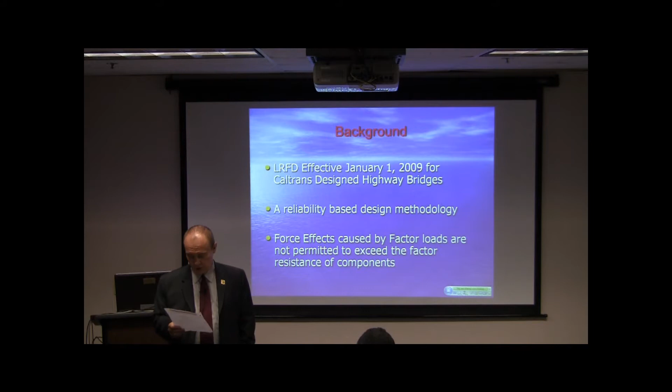So our first speaker actually graduated from an excellent school. Maybe I'm not objective. He graduated from, guess what, USC. His name is Sharid Amiri. He is a senior transportation engineer at the California Department of Transportation, also known as Caltrans. He graduated only 2 years ago, and his area of research was earthquake response of bridge pile foundations. His advisor was Dr. Jeff Martin, I believe. I was lucky to be on his Ph.D. dissertation committee. So I think I know what he's going to talk about today.

He has been involved with mega projects through Southern California in design and construction of major highway projects. He's a member of the American Society of Civil Engineers. He's a registered civil engineer with the state of California. He's a member of Caltrans Deep Foundation Committee, an affiliate of Caltrans General Earthquakes Committee, and Caltrans Post-Earthquake Investigation Team.

You should be in New Zealand then.

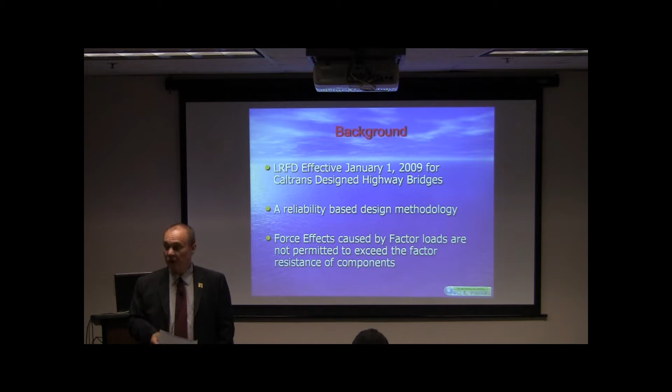He's active with the Transportation Research Board, known as TRB, and is also active on a particular committee called Bridge Seismic Design and Bridge Foundations. So, Sharid, the floor is yours.

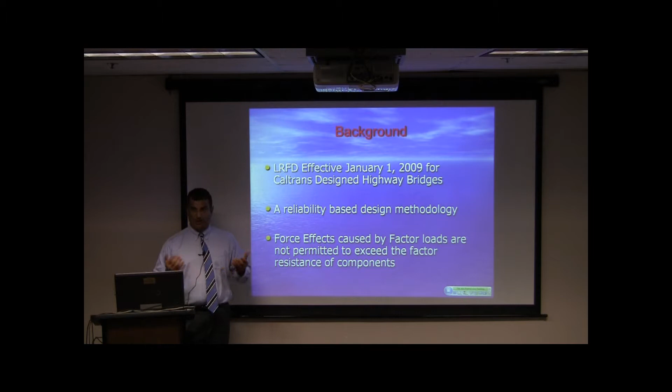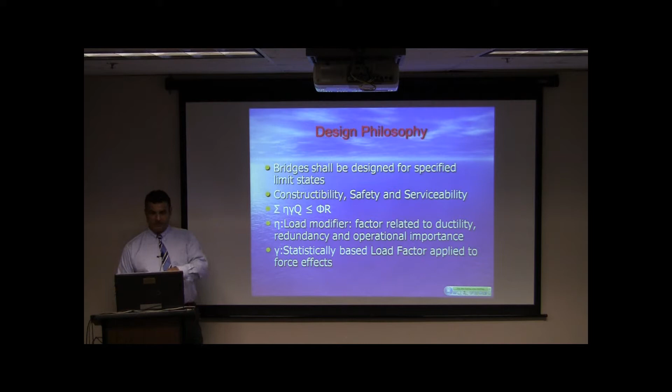Okay, now we go to the second slide. As I mentioned, there's an equation on the third bullet item. But before we go to that, the bridges that we're designing have to adhere to some design criteria for limit states. We'll get to that later on, but we also want to make sure that it's constructible, safe, and serviceable.

In the equation in the third bullet item, on the left-hand side of that inequality you have the summation of your loads, and on the right-hand side you have resistance. So as I mentioned, your resistance has to be higher than your loads. Now, every single coefficient within that equation has a meaning. The eta is the load modifier.

The gamma is the factor applied to force effects. But one word that you may want to bear in mind, it's important, is the emphasis on statistically based load factor. Why are we saying statistically based? And also statistically based resistance factors, which is on the resistance side. The phi there is the resistance factor. That goes, in my view, to the heart of the LRFD design methodology.

What we're doing is we're statistically looking at these elements, and we want to make sure that we don't exceed the probability of exceedance, and we want to make sure that we satisfy those limit states that I'll be talking to you about in more detail later on, which is different from a factor of safety, because as you know, when you're designing your bridge structural components, you used to use a different factor of safety for different components, be it foundation or otherwise.

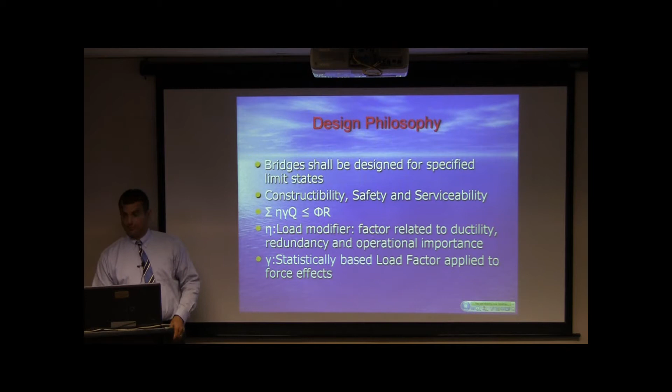Now we're departing from that, and we're using probabilistically based methods to come up with our resistance factors and our load factors for our bridge components, hence LRFD. Now, the Q is for force effects, but this phi is not the phi that a lot of people confuse with the soil friction angle. That's not the case here. This is a resistance factor that we use for LRFD, and it's a multiplier that is applied to the nominal resistance of your piles or foundations in this case.

Now, how do we come up with these resistance factors? Well, AASHTO, the American Association of State Highway and Transportation Officials, which is basically the body that comes up with the design codes for LRFD and design of bridges nationwide, has come up, with help from the experts, with the resistance factors to use. But here our emphasis is California. What do we do in California? We need to come up with these resistance factors for soil to design bridge foundations. We don't use a factor of safety of 2 or 3 anymore. Now we're using resistance factors. And how do we come up with that? I'll discuss that later with you.

But it's important to note that these resistance factors are different from state to state, from geology to geology and from site to site, and they need to be calibrated. And in order to calibrate those resistance factors, you need to have a lot of data in your hand, which I'll refer to later. That's probably one of the challenges that we will have, and it'll actually be an exciting thing to do. As researchers and practitioners, we need to emphasize that we need more database for these resistance factors to fine-tune our approach in LRFD as far as design of bridge components is concerned.

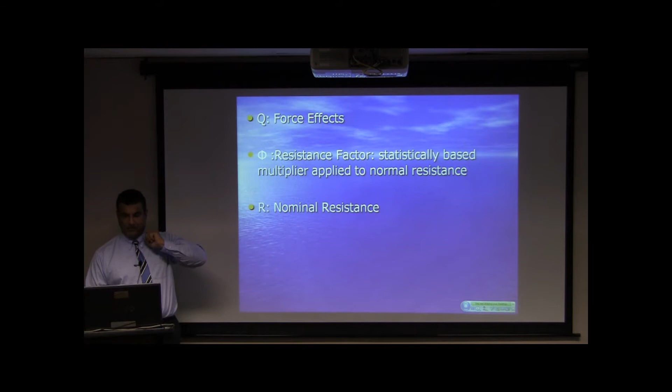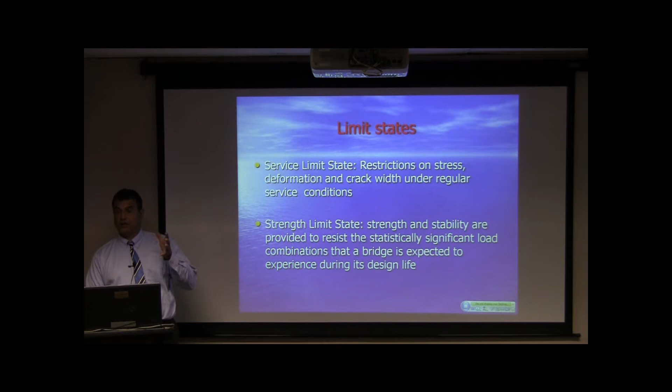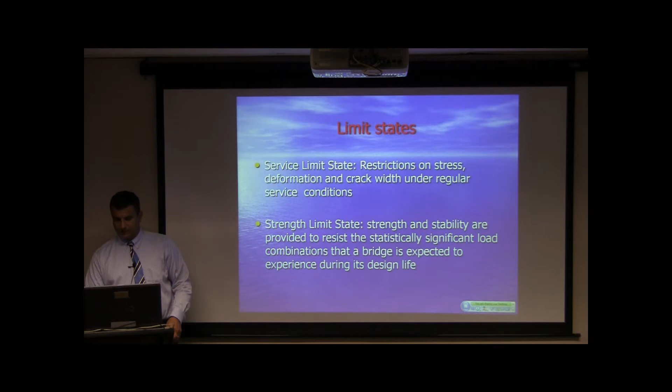Now, I mentioned limit states. For our design of highway bridges, mainly here in California, we're using the service limit state, which is basically stress and deformation under service conditions. And then you have the strength limit states, which are about stability and strength. These are important because you need to satisfy these limit states in your design as a bridge designer, a geotechnical designer, a foundation expert, or whatever your capacity is within the industry, or as a practitioner.

And of course, the last one, we can't miss that. That's the extreme event limit state, which here in California is mainly earthquake, but depending on which state you are in, you can have different issues involved. You have collision by vessel, you have vehicle collision. Of course, we can have that here too. Ice flow is not an issue here, as far as I'm concerned.

But the survival of your bridge depends on how you design it based on the extreme event limit state. And in California, our emphasis is to make sure that our bridge structure doesn't collapse under the extreme event limit state. It's the non-collapse issue. So if an earthquake occurs and your bridge is sustaining some seismic load, you want to make sure that your bridge doesn't collapse. If you want to go further, depending on which project you're dealing with, you do more than that. But as a minimum, it is non-collapse for the extreme event limit state of your structural elements.

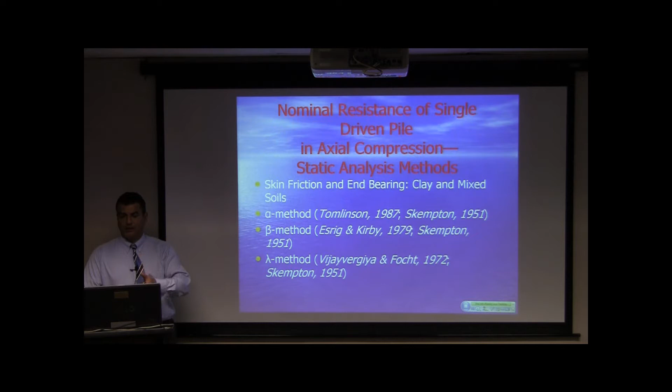For skin friction and end bearing in clay and mixed soils, I'm sure you're familiar with the alpha method, beta method and the lambda method, and these are the references there. If you are interested in the references, I'll be more than happy to provide them to you after the lecture. But the idea here is that in order to come up with your nominal resistance of a single driven pile in axial compression, you need to use these methodologies, and that's the key for LRFD. Of course, you have the SPT method as well and the CPT method.

Now let me ask a common question. Does anybody know what a CPT is? Okay, good, great. I'm using a lot of acronyms here, but the CPT is basically a cone penetrometer test that is being used in the industry extensively to find out what your subsurface conditions are. Basically, it's truck-mounted equipment connected to a laptop, and you go to the site, and that gives you a soil behavior profile of your subsurface conditions, which ultimately helps you with the design of your bridge foundations. That's what the CPT stands for.

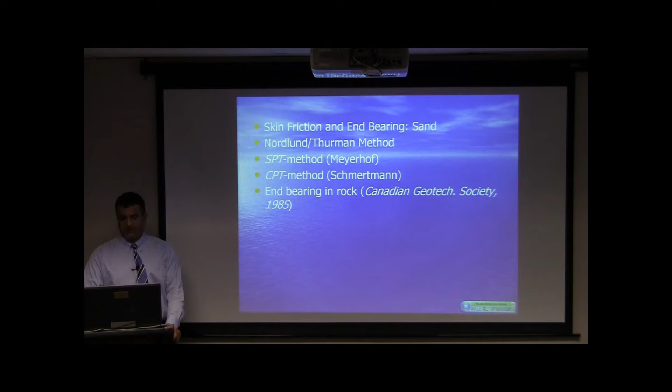And now the second type of foundation is drilled shafts. Drilled shafts are another type of foundation more and more being used in California to support our bridge structures, as opposed to the driven pile foundations that I was referring to. As is clear from its name, you're drilling a hole before building your pile, as opposed to driven piles where you actually drive the piles. And these are the methodologies used to come up with the capacity of drilled shafts. Now, why are we using drilled shafts more and more, one may ask.

One of the reasons, in my point of view and that of a lot of practices, is that drilled shafts can be made as large as you need. They can take a lot of loads, a lot of demand. And that reduces the number of driven piles or other small diameter piles, because you can use a large diameter shaft to replace a lot of driven or small diameter drilled shafts. And why do you want to do that? Well, in Southern California especially, or even in California for that matter, we are very much challenged or constrained on environmental aspects of our projects.

So when I mentioned constructible, you can design it as a practitioner, but you have to make sure it's constructible too. Reducing the number of piles reduces the footprint on your site, and drilled shafts would definitely be a favorite type of foundation for that. Second thing is it takes a lot of demand on the structural side. So from a structural point of view, it's a much more superior type of foundation, depending also on where and how you use it. But those are mainly the two reasons.

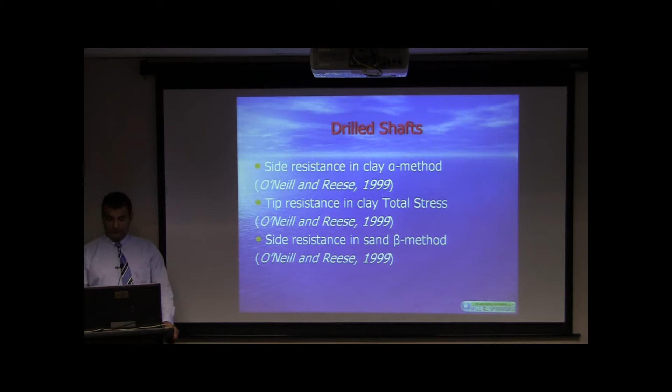Now, this is another topic that I think it's important to discuss, and I included in my lecture, and that's pile load test, its significance and why we're doing it and where we're going with it. It really directly relates to LRFD in the sense that when you want to design a pile, you don't always know how it performs in the field. So you have to monitor that. If you don't want to use the word monitoring, you can use other words, but however you want to word it, you want to find out how much these piles are taking.

Now, LRFD guidelines in California require that if you have a certain diameter of piles and larger, in other words, about 36 inches or higher, then you need to have some sort of pile load testing. Now, what is a pile load test? You design your piles based on those guidelines that I just referred to in previous slides, but you need to test it out in the field. And that's where you do the pile load testing, to find out exactly how your pile performs. And based on that, you can calibrate your resistance factors, which I mentioned earlier, your phi factors.

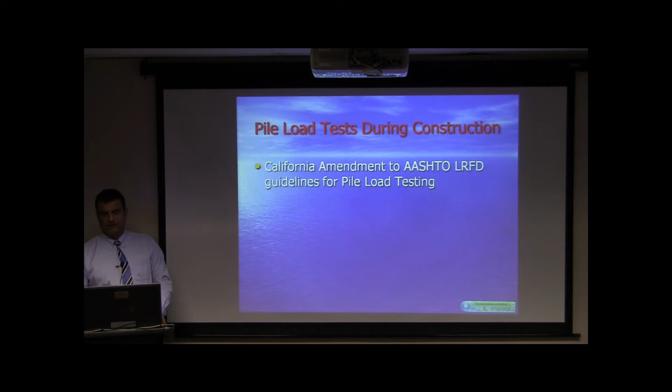Now, one thing that you also want to remember from this lecture, if nothing else, is that California guidelines are not exactly the AASHTO guidelines. We have taken the AASHTO guidelines from a national level, but we amended them at the state level with our own guidelines. Hence the California amendment to AASHTO LRFD guidelines, not only for pile load testing, but also for design of deep foundations for our bridges, and even for design of our bridges. Those amendments were finalized at the end of 2008. And the LRFD guidelines are the 2007 4th edition by AASHTO.

Now, I mentioned the calibration for resistance factor is very important. Right now, we're using a resistance factor of 0.7 in California for piles. That could change depending on if you do pile load testing or other sorts of monitoring, but that's what we use purely on design. Our hope and our goal is to calibrate these resistance factors by performing more pile load tests and other methods to find out exactly what those resistance factors are, and then apply them to our pile design. But at the current time, it's 0.7, which is, by the way, different from AASHTO guidelines. It's actually higher, which means your piles will be potentially shorter.

And again, it's not final, but based on my interaction with other DOTs, Departments of Transportation nationwide, North Carolina has some experience with LRFD, other states as well. I'm sure they all made it effective a few years back. When you use the resistance factors based on AASHTO guidelines, you are likely, in my view, to be over conservative. But then again, it depends on project site and geology, where you are, whether you're on the coastal side of North Carolina or within the other areas.

My experience in California is that right now we're trying to get more projects going, and we're trying to do more pile load testing. Based on that, we can calibrate more and get that data, hopefully. And not only that, just by designing it and finding out how the piles perform, we can get more insight into where we are as far as LRFD. But definitely that's how we're designing it. We're doing LRFD in our approach here in California.

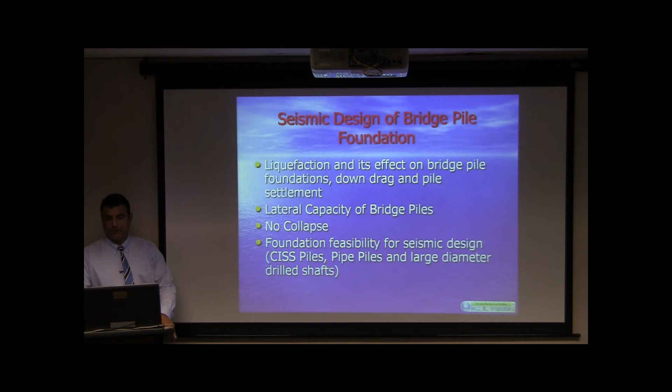Now, what are the challenges ahead? In my point of view, we need to have extensive field tests. I mentioned the resistance factors and how we come up with those numbers, like 0.7, and they're based on some calibration, but not really on extensive calibration out in the field. Extensive field tests for bridge pile capacity are required for calibration of resistance factors. The challenge is that, as a structural engineer or geotech for bridges, you need to sell that concept to the owner, that you need to have this testing out in the field.

Sometimes they may not want to do that: if it's not required, why are we doing it? Are we doing it just because you want to calibrate and get more data? So you need to explain to them that it's critical for calibration of your resistance factors, and ultimately it's cost effective at the end of the day, and you give a much more efficient system as well.

And then there's the potential for overly conservative design for piles, hence more cost. By that I mean, if you use low resistance factors, as the gentleman was mentioning, you get longer piles. Longer piles could be overly conservative and can add to the cost of your construction.

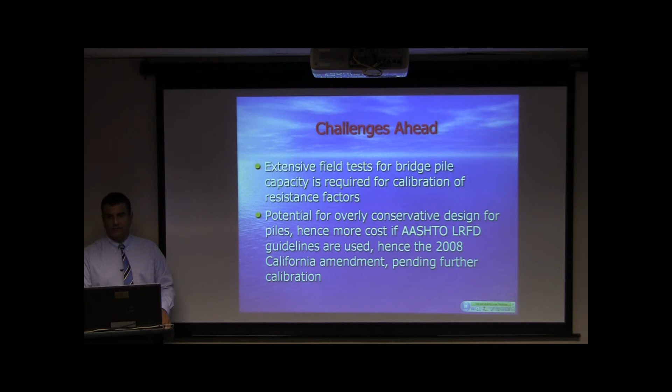cost of your structure. So it is important that as designers and practitioners, you're keenly aware of the importance of how you want to design your foundations based on those resistance factors, and hence have a very efficient system, and also bring your cost to an acceptable level so you can manage the project. So that, again, goes to the heart of the LRFD design approach. And nationwide, we're doing calibration of these resistance factors depending on the regions and where we are.

In conclusion, I want to say that LRFD is basically a probability-based design. That's the cornerstone of LRFD design. It's a logical extension of the LFD procedure, which is load factor design. And by that I mean that it recognizes that there is variability in loads. So it extends that idea, and it explains how variable the loads are. And so LRFD recognizes that.

And also, it gives us a more rational and systematic way for selection of load and resistance factors. And I think it's also important to realize that we're now bringing the entire system together. Now we're looking at the system response, the bridge superstructure and foundation together. The geotech and structures are interacting a lot more in LRFD, which is another key component of designing bridges.

We used to look at it as geotech, you deal with foundations, bridge structures, you deal with this, and now there's much more interaction going on, and it's required that we interact amongst ourselves to design the bridge components of the system, mainly at the foundation level, by using LRFD, and that requires a lot of interaction between geotech professionals and bridge and structural professionals.

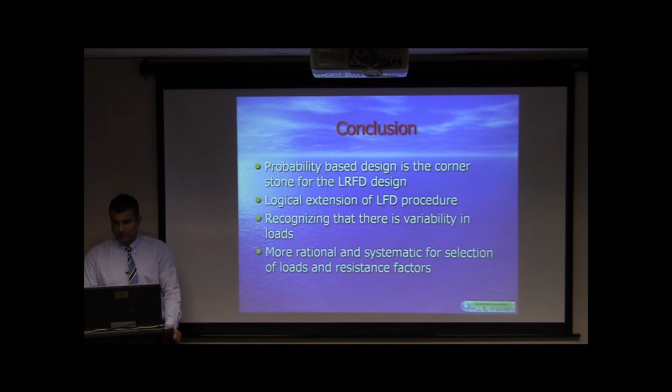Last one, I want to show you this picture. It's interesting. I worked on this project a few years back. This is prior to LRFD, but it shows how urbanized an area we are living in. This is the SR22 project, actually the first design-build project on a state-owned highway in the state of California. We called it SR22 Phase 1. The photo was given to me from the project, and it's a demolition happening on the 22 southbound I-5 connector structures.

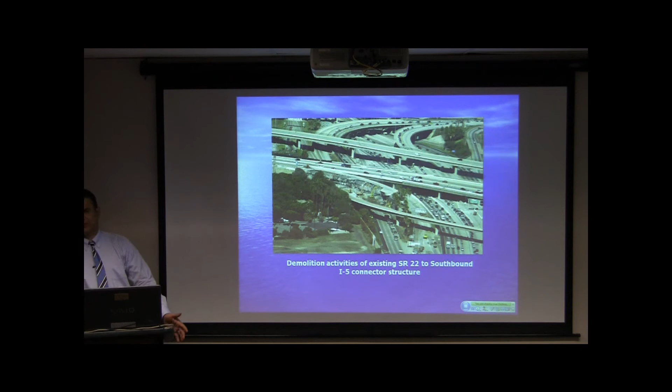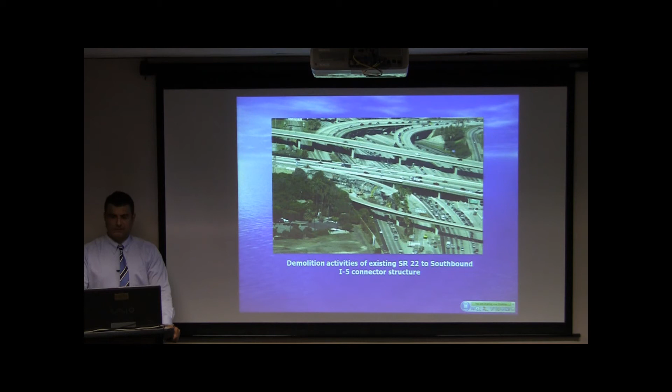When you go into Orange County, it's very close to Irvine, maybe a few miles north of Irvine. So you can see the demolition of that whole connector structure there to replace it with a new one, and a lot of effort went there. It was a so-called mega project. Typically, if it's over 100 or 150 million dollars, I think it's called a mega project. This project was over $400 million. It widened or replaced about 35 bridges in Orange County.

I think that's the end of my presentation, and if you have any questions, I'll be more than happy to answer.